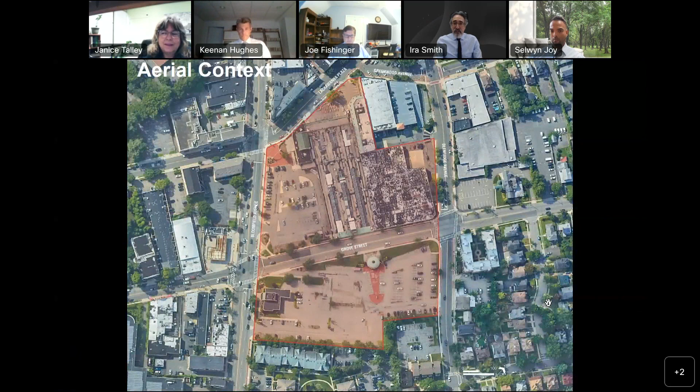As we look at a number of slides I'll share with everyone, I want to make sure it's understood that these are conceptual images, illustrations based on the current redevelopment plan and consistent with the guidelines and requirements therein. It doesn't mean exactly what you see will be built, but something very much like it. That's maybe a place where people might have follow-up questions, but as we go through the presentation, I'll do my best to explain what is a requirement versus what the guidelines might allow for.

Before we go on, I'll explain quickly. I'll take you through some visuals associated with each of these areas, and then we'll take a deeper dive into each. When we talk about leaner, we're talking about reductions in mass, meaning every building previously proposed has been touched. I'll explain how, and you'll see that in a few minutes. The number of residential units has been reduced—it was 375 previously, now it's 300.

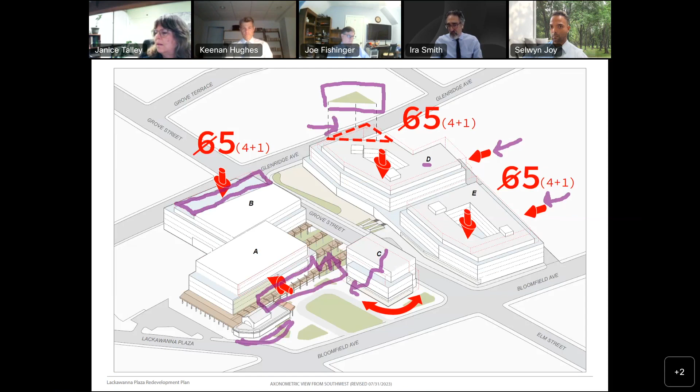And then finally, building C. Building C has been mirrored, and the result is that it now steps down toward the plaza in recognition of the scale of the waiting room, bringing more attention to the entrance of the supermarket and the historic platform canopies that will remain there. So it's still shaping that outdoor room, but doing so in a gentler manner than before.

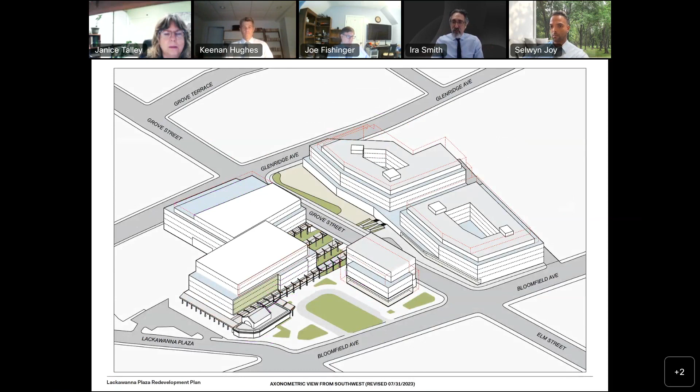And this is just to depict the same view without all of those notes and annotations. I believe this is being recorded, so people should have a chance at a later date to zoom in, freeze, or pause the screen, and see the difference between those dashed red lines and what I was just describing.

Next slide. Now we're actually in the northeast corner. We were previously closer to the intersection of Bloomfield, Gates, and Lackawanna. Now we're in the northeast looking toward the southwest.

We can see the rather dramatic removal of the mass shown in the dashed red lines here, producing the pocket park I've mentioned. You can also see how building B is scaling as a 4-story building along Glen Ridge and jumps up to 5, not 6 stories, as we travel southward.

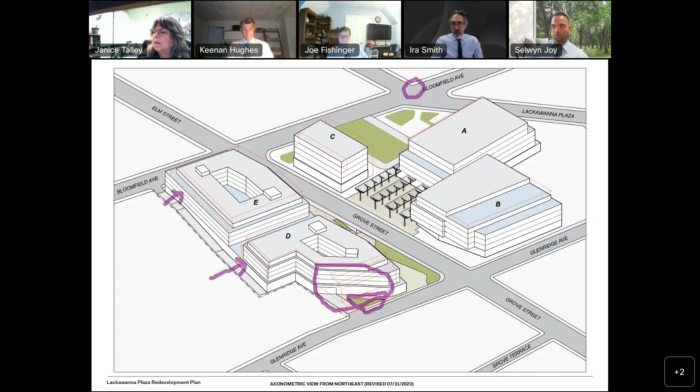You get a little bit better look at buildings D and E. Oops, sorry, Keenan, wasn't quite ready. You can see how the masses of buildings D and E have been pushed away from that eastern edge as well in this view. Okay, next slide, thanks.

So when we talk about historic preservation, the waiting room is the star of the show, and it's not going anywhere. There's language for its preservation and adaptive reuse, outside and in, but there are other historic elements on site. Next slide. All of these are described in greater detail in the redevelopment plan that was posted a few days ago.

But quickly to orient you, the platform canopy that faces Bloomfield Avenue remains complete and intact. The brick wall is what's removed, and that becomes the new face of the supermarket. There are other canopies on the eastern side of the waiting room; those also remain in place and are untouched.

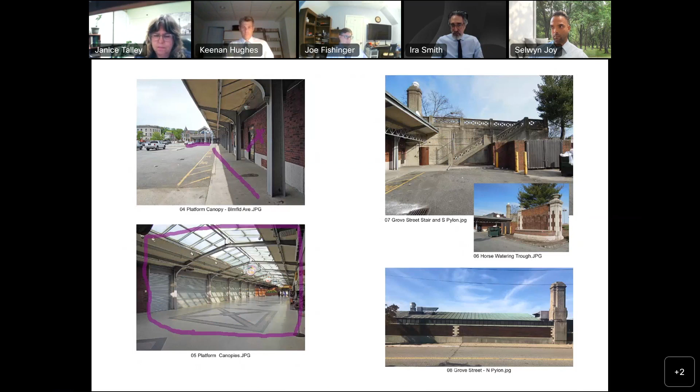Inside the mall, we have several platform canopies. Approximately half of those remain in place and bring character and a dynamic environment to the future station plaza, and I have 3D views of that. The other half of those platform canopies are allowed to be relocated in the plan, and that is the case.

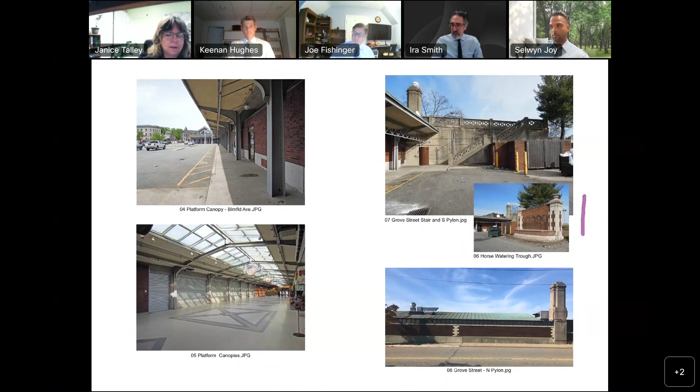Upper right, we've got the old commuter stair that leads up to Grove Street - that'll be rehabilitated and become functional again. The horse watering trough is one of the only other elements that is allowed to be relocated in the plan. Below that, we have this decorative pylon; its mate is closer to that commuter stair. Both remain in place and are to be rehabilitated.

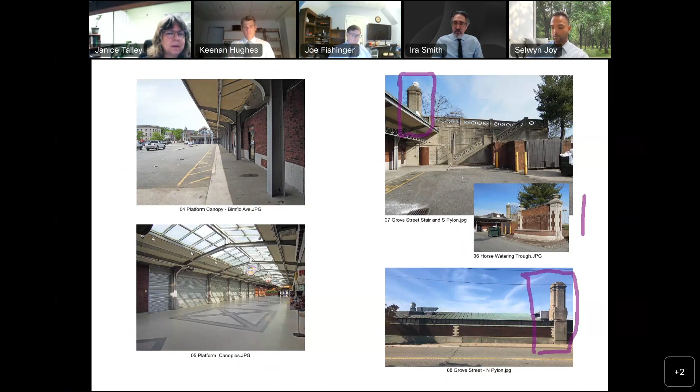Next slide. Ira, if I can just quickly interrupt, I'm sorry.

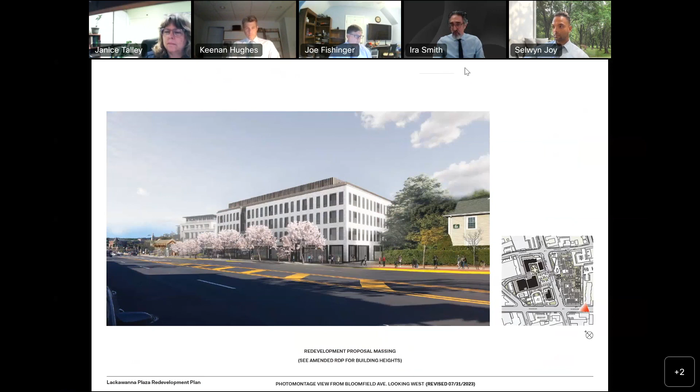This view's been circulating a bit, showing from across the street what the effect might be. The building will read as a 4-story building from most locations. If you're across the street, you'll get a peek at that 5th floor, or if you're further west going up slope, you'll get a peek at that 5th floor as well.

Greener. When we talk about greener, there are different facets of that as well. One entry point is to talk about open space. Open space not only facilitates the possibility of greenery, but also usable additional space—you could think of it as passive recreational space.

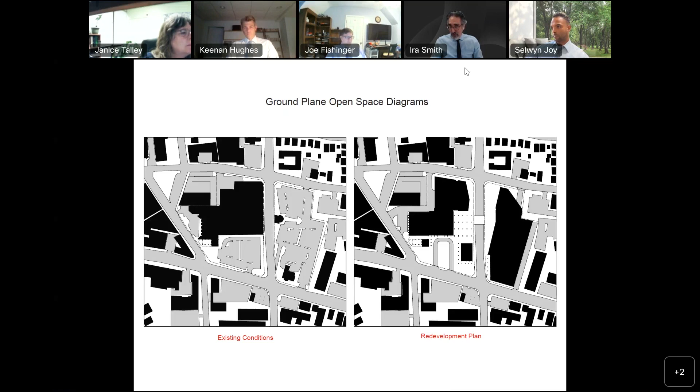It's important to note that these mechanisms for access and the intention for creating relief and open space in the town center is not new. This is a policy we've been working on for several years with redevelopment projects.

Seymour Street is the first example of that, where a public street was retired in order to create a public space that could serve multiple functions.

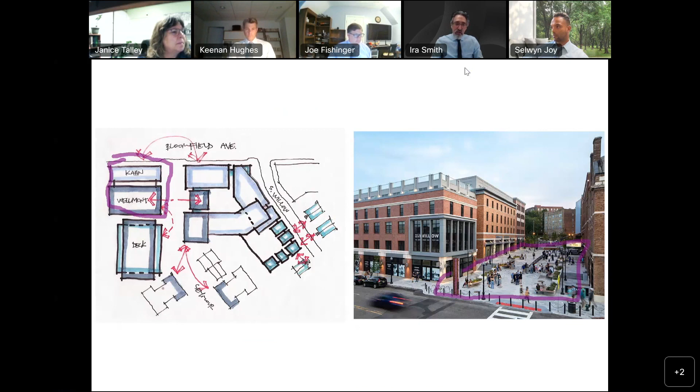We can also see a diagram on the left that our team worked on to help describe strategies for the redeveloper, borrowing from existing buildings—in this case especially the historic Wellmont and Kahn—to become influential on the design of new buildings, so character could be maintained even as we change the rules of the game toward creating more inviting, calmer, quieter, safer, healthier streetscape environments.

A lesser known project, just going by the number of people I recall in attendance, is another redevelopment plan under construction now on Church Street next to the Unitarian congregation. The first proposal was for up to a 6-story building that filled its block, but through very helpful feedback from the Planning Board, the Historic Preservation Commission, and other town bodies and commissions, the plan on the right is where we landed.

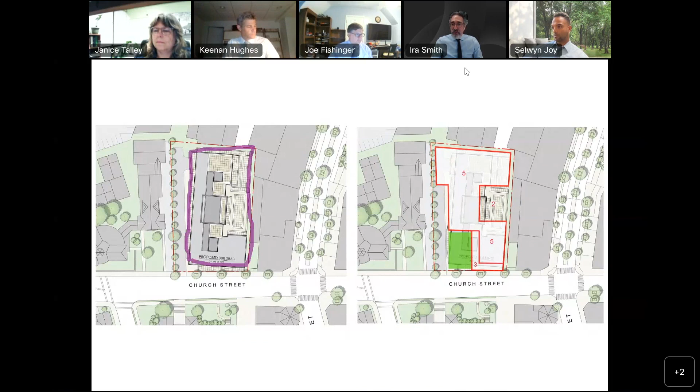Without getting overly technical, what was achieved was a much smaller frontage on Church Street. So you have a 3-story structure, stepping back on that 3rd floor to floors 4 and 5, and then pushing the rest of the building well back in order to create a public plaza, the depth of which matches the depth of the lawn in front of the Unitarian Congregation Church, in order to create a more ample space and preserve the character and sightline to that church, which is a beautiful building.

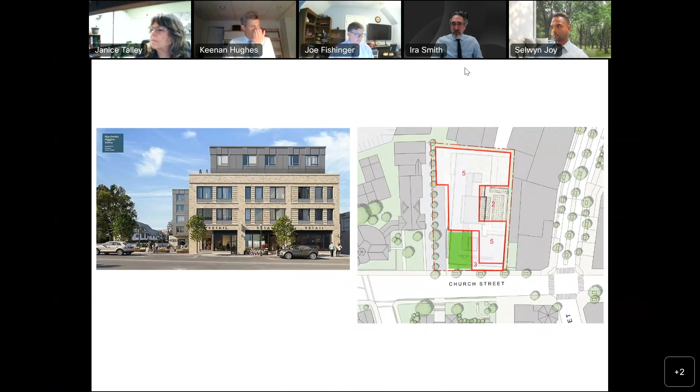So a lot of the same mechanisms and processes are at work here on Lackawanna Plaza. Next slide. I think this drawing is a good way to get into this conversation about accessibility, safe space, healthy space. You're looking at a diagram that is doing a lot of things at once. So the supermarket has certainly been a key element, maybe the key element, in this entire plan.

And we can see how it's accessible from a number of routes. I'll actually start with a vehicular one. You can get to the supermarket from the east. You can either travel into the main plaza and drop someone off and then pick them up later. You could take an Uber. It doesn't have to be someone you necessarily know that you're relying on to get there.

If you're traveling east, you could continue on and park by turning off of Lackawanna Plaza and traveling up a ramp to the parking garage that sits above the supermarket. And then you can descend directly into the supermarket, your choice of escalator, stair, or elevator. And to leave, you would ascend one of those routes and egress through here in your vehicle. You could either head northward or westward in order to decide whether you're going to go north or south at that point.

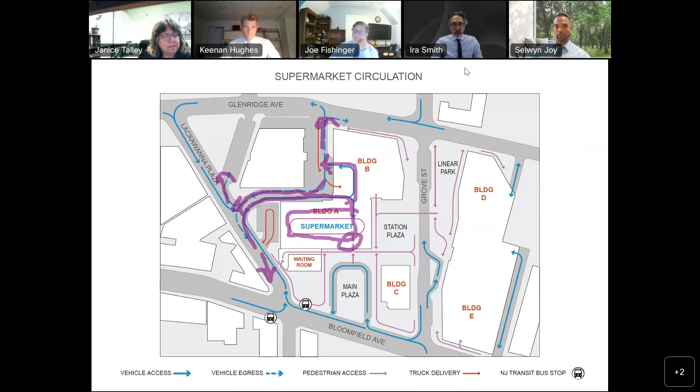I'm showing these routes because I think there may have been some miscommunications or misunderstandings, or dare I say it, misrepresentations of the many ways you can get to this parking garage. It's accessible as well, traveling from the east on Glen Ridge. You can enter this building this way to get to that parking deck above the supermarket. Obviously it's the same thing if you're coming eastward on Lackawanna, or rather Glen Ridge onto Lackawanna, you can get to that ramp.

For the sake of time I'll move on, but there are also thin purple lines. These represent the many ways in which pedestrians can easily access the site from neighboring properties. And it shows how we have retained the main plaza, Station Plaza, and the linear park, and this is now the pocket park, all of which you can access in a direct route if you'd like. You don't even have to stop and buy anything. You could just amble through here on your way, perhaps to Bloomfield Avenue and in reverse. So there's very much a park-like character to this entire property, which is unique to any development that's happened in this town in over 100 years.

And it's, again, not out of the blue. These are picking up on lessons that we've learned from most recent redevelopment efforts. Next slide.

So in many ways, the images I'm going to show you remain intact, and it's worth mentioning in terms of greenery, sustainability, the site, because it has new buildings, affords the design team, the redeveloper, the opportunity to better control stormwater. You're catching it on rooftops instead of asphalt, and bringing that water down in locations that best suit you.

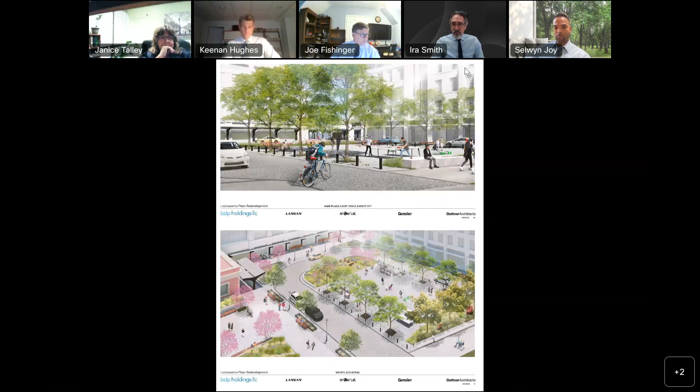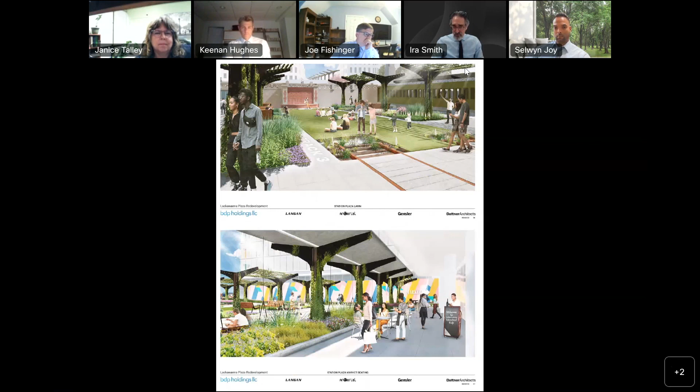So in the top view, we're looking east toward Grove Street, and in the bottom view, we're looking west toward the supermarket. Next slide. And the linear park, I think this image has been shared a lot and published quite a bit. The image above may not have been shared quite as broadly. I don't know if we can zoom in at all. Keenan, is that an option? If not, I can.

Okay, no problem. So you can sort of make out that both of these buildings—this is D on the left.

I got some enlargement on my end, thank you. D on the left has lost its 6th floor, so has E on the right.

But I want to call attention to what's happening at the ground level. We've got retail facing Bloomfield Avenue, a classic urban street wall, which transitions quickly to alcoves that will be outfitted with electrical and lighting to serve as flexible festival space, if people want to set up small areas to sell wares, crafts, and so on.

That'll be easily accommodated. Right where we have a grade change, which is pretty much existing—that dramatic grade change—there's a wonderful transitional space, a combination stair and ramp that brings you down to the lowest level of the site. That also is the point of entry for the residents of buildings D and E.

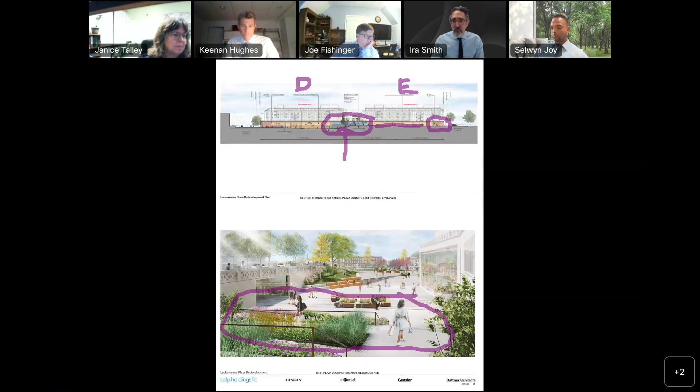That lowest point corresponds to the pass-through underneath Grove Street, and then transitions to a gallery wall, a reserved conditioned space, which we can see in the bottom right. The idea is that the property owner will coordinate with local galleries, institutions, and organizations who can use that space for changing exhibitions, so that the linear park becomes a destination of its own—a kind of outdoor exhibition space.

It's important to note that the passage under Grove Street is dramatically different than what we see today—much shorter because the rotunda is no longer there on the east side. The enclosure is removed on the west side, and the embankment is reduced on the east side as well.

So you'll be able to see very easily, before you even enter through here, Station Plaza as a destination—very wide and inviting, and a much better lit route than what we have today.

And then as we continue on, we have the return of retail along Glen Ridge. There's retail on building B as well, on the west side, in order to provide continuity with the commercial activity that's been percolating and evolving along Glen Ridge further west.

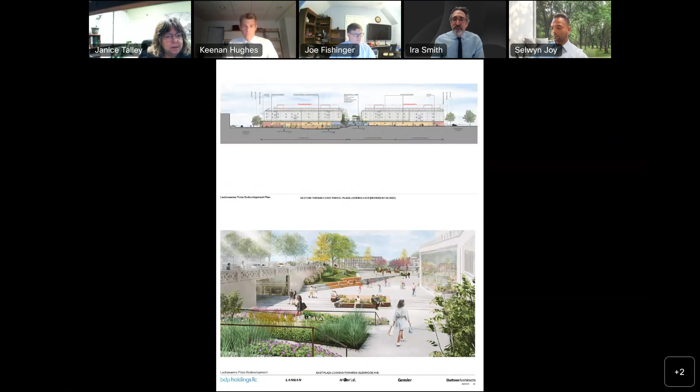It's important to note that at 8 a.m., you can see the shadows cast—this is the winter solstice, the day when the shadows are longest. At 8 a.m., the shadows are primarily contained on site, and by 9 a.m., all the shadows are contained on site.

At 11 a.m., shadows are contained on site. I'm in the upper right now. Bottom left, shadows are contained on site—that's 1 p.m. By 3 p.m., shadows are starting to creep onto neighboring sites.

Keep in mind, sunset is at 4:32 on the winter solstice. So at 3 p.m., we do have some shadow on the post office. The shadows have cleared the multifamily house at the northeast corner of Glen Ridge and Grove, so we're really only seeing a little bit of shadow on these properties.

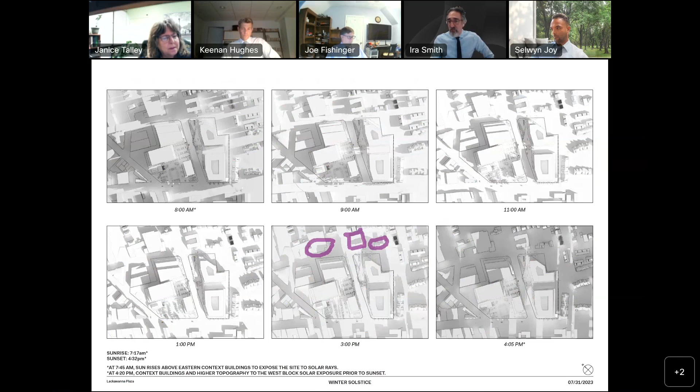By 4:05 p.m., the shadows are getting much longer, but that's going to be true for all of the properties in this area. Importantly, the shadows are just beginning to touch the Montclair Mews at 4:05 p.m.

At 4:20, one of the things we learned from producing this model is that because of the change in topography heading westward and the presence of First Mountain, you actually get a block of solar exposure—the shadow cast by the upslope conditions and First Mountain itself. So we're talking about a 15-20 minute period of loss of direct sunlight in the bottom right corner—not a very long period of time.

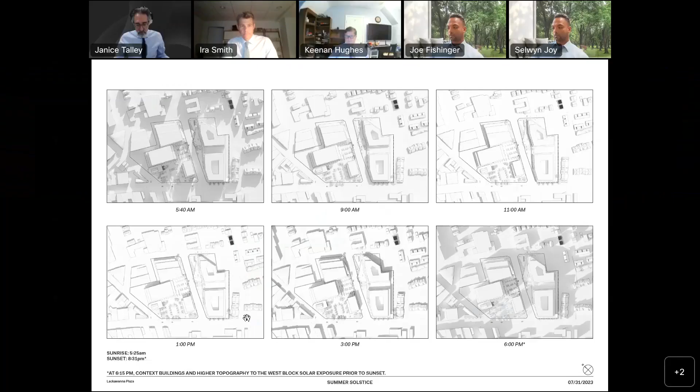Yeah, no, feel free to interrupt. I think this is the first time we've done a redevelopment webinar, so we're making sure we're getting it right.

So what I'll do, and I think I might need your help, Keenan, I'll walk through this. This is the second and final solar study I will share. I'll give a couple of examples of height reduction, but Keenan, maybe you might have faster access to the changes in height than I would. If we can't do it in this moment, I'm sure we'll be able to pick it up because I know you have slides that specifically show the current building heights. Yeah, I'm happy to cover that.

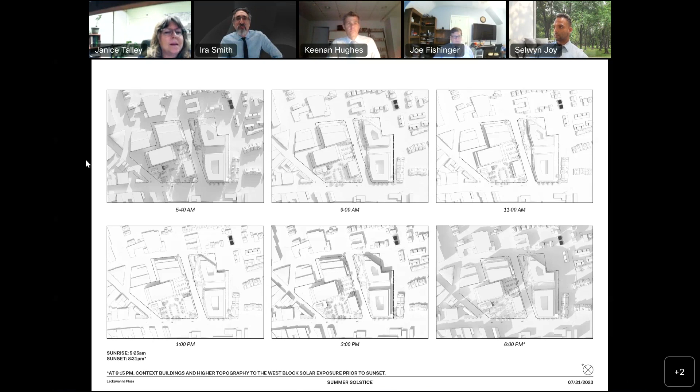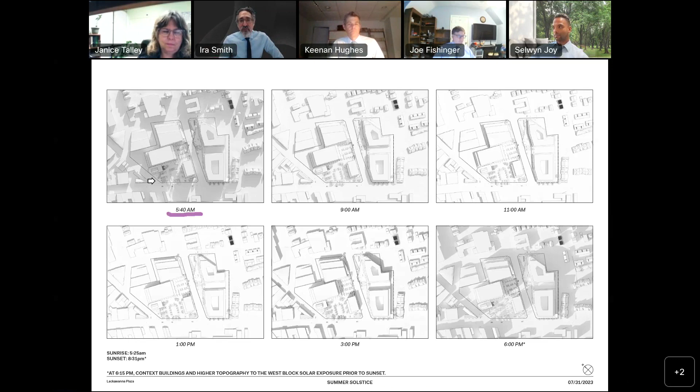So the summer solstice is another extreme time of year. It happens to be when the sun is highest in the sky compared to winter solstice. So it's no surprise that, let's say at 5:40 a.m., we do have shadows. They come from a different part of the sky because of where the sun is and the Earth's rotation, the Earth's axis of rotation. Most of those shadows that are long are dropping onto Bloomfield Avenue with low impact on neighboring buildings.

By 9 a.m., one can see how tiny the shadows are because the sun is increasingly overhead. At 11 a.m., the shadows are even smaller. 1 p.m. is practically the same, on the other side of noontime. By 3 p.m., we do start to see some shadows. By 6 p.m., the shadows start to grow.

Now, because of the rising topography to the west, we start to get shadows from the topography and First Mountain as early as 6:15, even though the sun doesn't set till 8:30. By 6:15, the area will be overwhelmed with upslope shadows. The Mews is barely touched here, Matthew Carter as well.

It's important to note for both the winter and summer solstices that I've been discussing, we're talking about one day of the year, and this occlusion or blocking of the sun will happen, as I've shown it, on those two days of the year, and for a little bit on 3 or 4 days either side of those days. So it's a very limited number of hours toward the end of those 6 to 8 days. Otherwise, the project is sculpted in a way that is very respectful of preserving light and air to its neighbors.

Last, I want to point out, because it's also been asked, well, all of this open space and the greenery, the screening on the garages shown on the east face and the south face, how much of that is really going to get sunlight? One can see, without going back, that for very large parts of every day, because of the orientation of the buildings and the fact that there's a big gap between buildings D and E, sunlight pours into the South Main Plaza almost every day of every year.

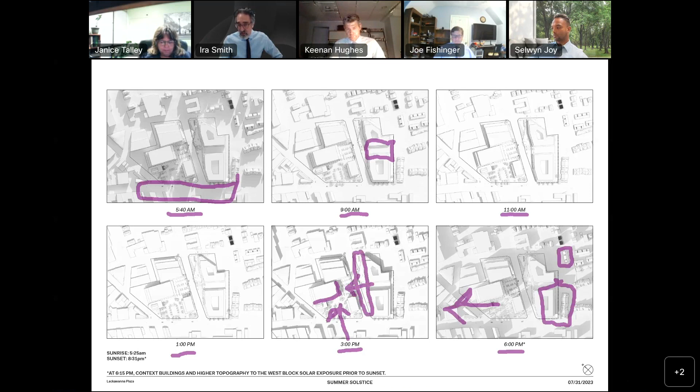You get an abundance of sunlight in Station Plaza, and you'll get sun because this is mostly separated by a great distance from everything happening on the west. The Linear Arts Park will also thrive and should not be a problem.

Now we enter the last piece of this presentation, my part. Again, I'll rely on Keenan for the differentials on the heights we used to have versus the heights we have now. I will mention before he does that there had been some discussion or claims that the buildings could rise an additional 20 feet beyond the number of stories or building height allowed. That language was in the previous plan because we were reserving a 10-foot by 10-foot footprint on each of the buildings for sustainable mechanical equipment.

There are certain kinds of machines that reuse water that falls on the building or that's being used in the building, repurposing it for gray water or for even cooling the building. So we've modified that language, so there's no extra 20 feet allowed. The change now specifies that a 10-foot by 10-foot by 20-foot tall piece can only be used if it is part of the sustainable mechanical systems.

So we go into robust historic preservation, and for those of you who know me and my involvement with the township in days past, I'm very excited about this part of the project.

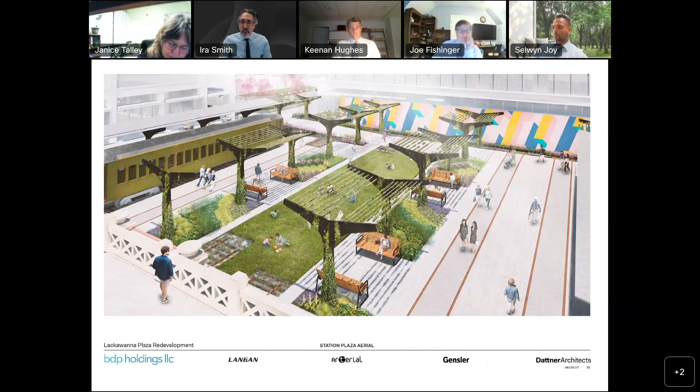So a lot of you have probably read about the redeveloper's commitment to rail transportation as a kind of personal passion. You are looking at the actual rail car that ran on the Lackawanna rail line, which the redeveloper purchased and is currently undergoing full restoration, I believe at the Whippany Railway Museum, a highly regarded regional center for telling the story of rail in this area.

These two views are already several weeks old, but the rail car serviced this station, and as unlikely as it is, the intention is for this to have a home in Station Plaza, or come back home to Station Plaza, serving the additional purpose of helping bring the station back to life and maybe becoming an educational tool so people can look in or possibly have tours of this rail car. It also provides a lot of character for the space.

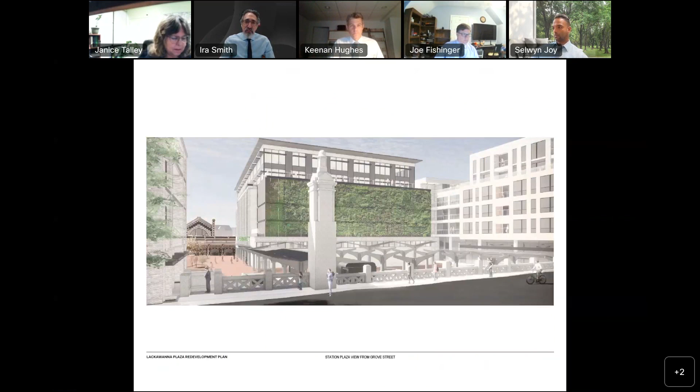Now we're going to see some new imagery related to this space I described, the skylit passage. We're still on Grove. You're looking at the station plaza on the left, down below us. The rail car is situated here. The supermarket occupies the first floor beyond, and this is the parking garage with one of the green screens shown.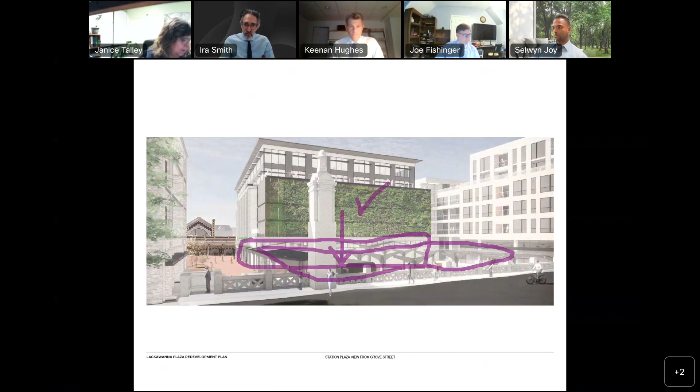But the part of this image we're going to focus on is over here, and the next slide is an enlargement of that area. So what you're looking at right now is the rejuvenation of this passage that connected Lackawanna Plaza, the street, to the east side of the site.

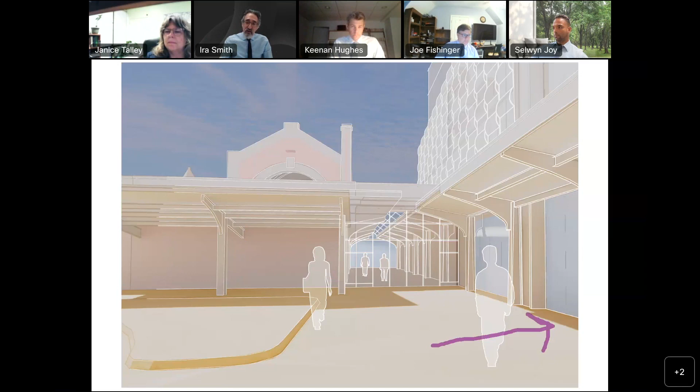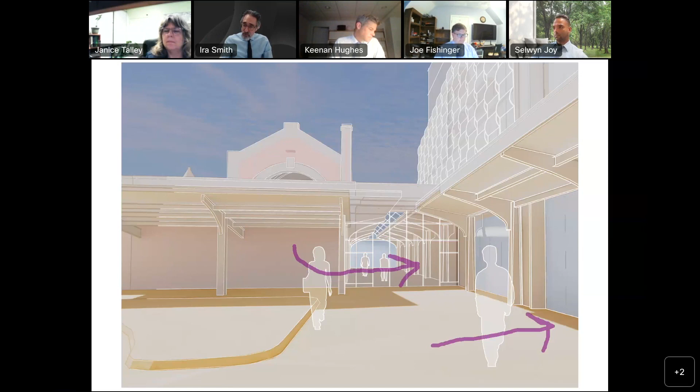You could walk up to the canopies or platform and board your train if you happened to be coming off of a carriage or later a car. You could walk right onto your train on that platform. But if you weren't using that first platform in the bottom right, you were more likely coming in through the waiting room and heading that way to one of the points of access off of Lackawanna Plaza where the other platforms could be reached. But maybe you were just walking from the west and needed to get to this platform.

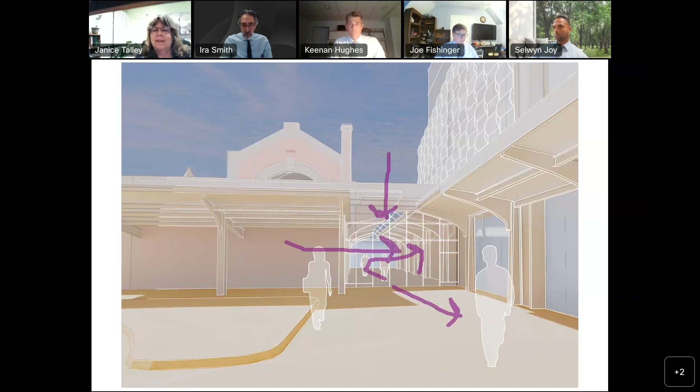So pre-existing was this space. It was open on both ends, had a skylight, and protected you if you were in the waiting room and it had been raining or snowing. You could wait out here before you went to the terminal shed area or headed east. This will be recovered and become an integral part of circulation in this plan.

How is this possible? How does it relate to Building A? You're looking at Building A on the right side of this image. It's no longer a sheer wall continuing up from the column line near the platform canopy. Here's the historic platform canopy.

It now steps back twice. Let me clear this. The first step back is 8 feet, and the next step back higher up for the 5th and 6th floors is 4 feet.

There's also a requirement now for a screen on the parking garage, which, as the prior view showed you, will help further reduce the apparent bulk and height of Building A. I hope this drawing illustrates how, by doing this, you clear out room for light and air to get back into that skylit passage, which is what you're seeing right here.

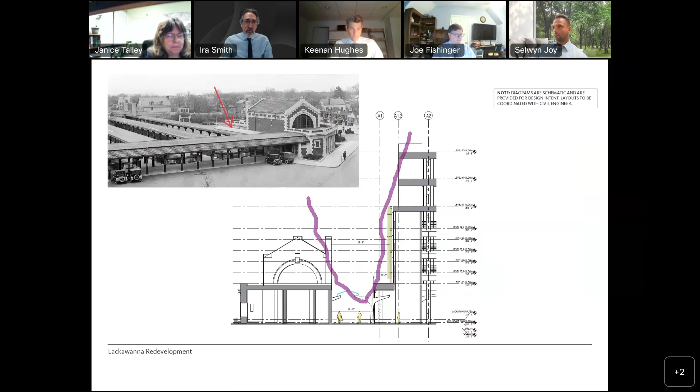In this historic photograph, you can actually see it. The red arrow up here is pointing to the skylit passage.

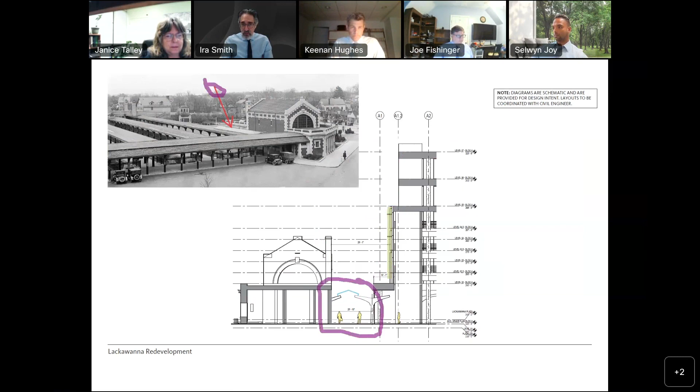So there it is on the right. This space exists today. It's just been blocked off to the east and west. Unless you worked at Pig and Prince or in Pineapple Express, where they store things currently, you wouldn't even know about this space. You can see up through the skylight the north face of the waiting room, a very dramatic, exciting view to have and to bring back to the public.

In the current redevelopment plan, looking now in the bottom left, we're going to open up the colonnade. It had always been an open outdoor space, and it's going to become that again. You walk past the waiting room to get a glimpse in, and there's a set of doors here, again historic, that will be made functional so you can enter into the skylit passage and continue on your travel eastward, or vice versa from east to west.

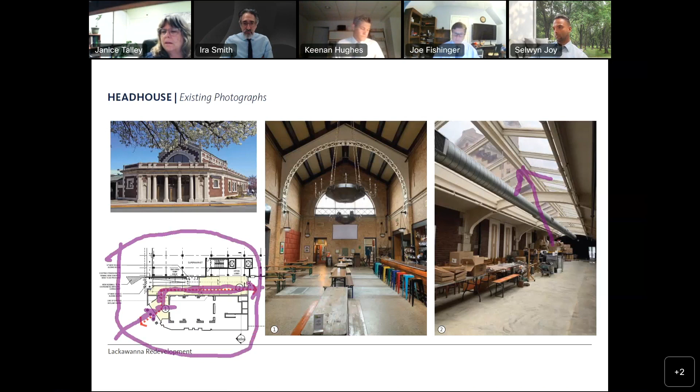I'm drawing over my drawing now. Next slide, it's an enlargement of that passage, that circulation path I just described, but it shows you a little more clearly how you can circulate from the east to the west, bringing back to life the original use of this western face of the waiting room.

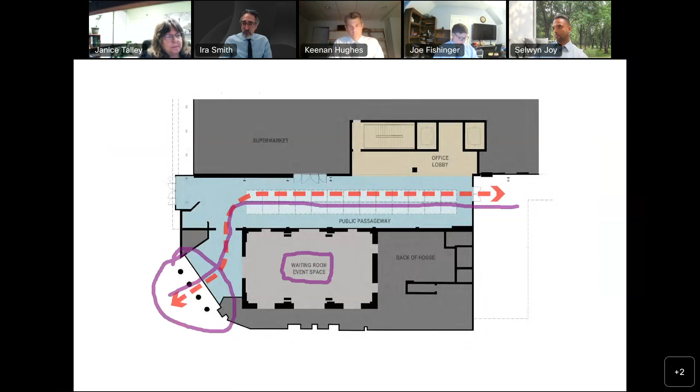Now, the waiting room itself, you see it's also called event space. The current plan describes the use as reserved for events, exhibitions, and similar spaces. I'll also mention that the plan allows for enclosing the east and west ends, so this can be a conditioned space, which turns it into a rather functional space.

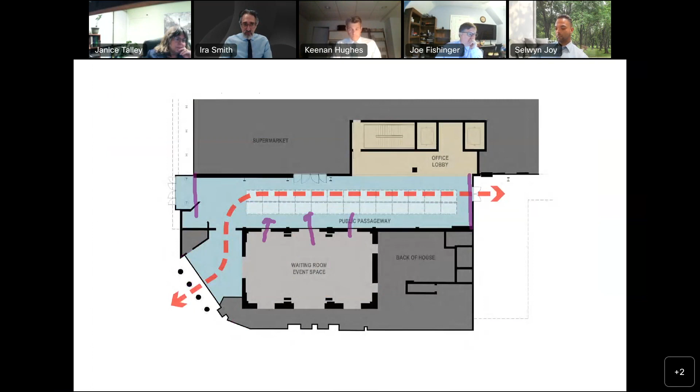For events happening in the waiting room, there's expandability. If there were to be, say, a nonprofit or fundraiser or some other event here, you're not limited to just the space of the waiting room. People could flow and share the two spaces, which increases its flexibility and possible uses.

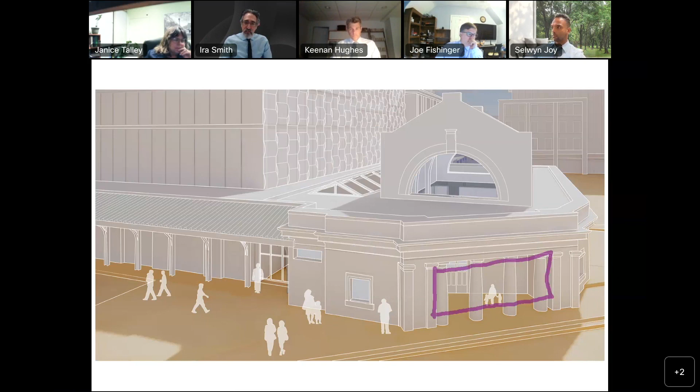Here we have a view from the west, and you get a good orientation. Presently, there's a storefront or glass and steel wall just a few feet in back of this colonnade. That goes away and returns this colonnade, or group of columns, to an outdoor space. So you are invited in to the doors I've mentioned.

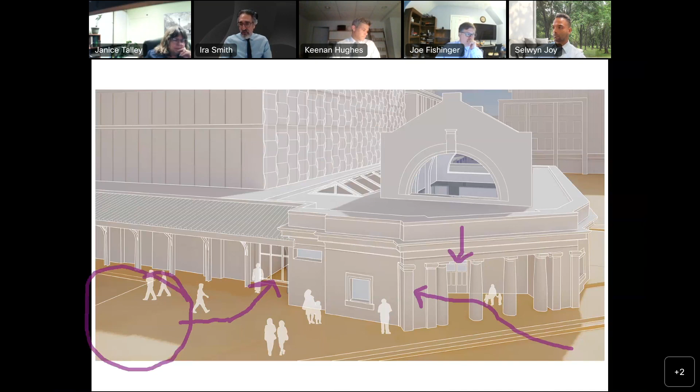Here are the waiting room doors, so you get a peek in if you'd like. And the storefront enclosure over here on the left, beside the terminal shed, because the plan expects this former parking lot to be used for pickup and delivery for the supermarket, as opposed to typical consumers using that parking lot. The expectation is that we want to separate the more commercial traffic from the more consumer pedestrian traffic. So that's how that would work.

We have one more view of this layout. Ground level, this gives you a better appreciation for how the terminal shed will appear. Building A steps back from that roof. We can see the entry into the waiting room and the doors that let you into the skylit passage.

You'll also notice this view, which is showing the screen in front of the parking to minimize the mass and its presence. We have 4 swatches on the upper left of this image, and we also have more traditional manners of screening that are described in the plan. But in accordance with historic preservation guidelines, you don't want to create an architecture that confuses the public as far as what's old and what's new.

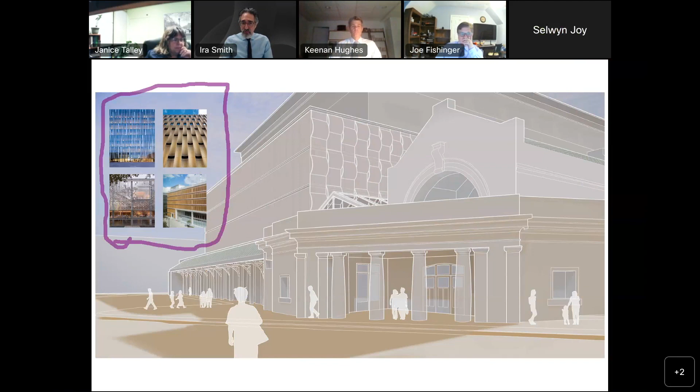I do believe that it's possible to have a beautiful screen that's dynamic and sensitive to the craft and scale of the waiting room itself. So you're looking at 4 examples of that. Upper left is frosted window sort of scales, if you will. Upper right, you're looking at metal perforated banners that are interwoven. Bottom left is a honeycomb of ceramic elements that disguise what's behind. And then in the bottom right, a more straightforward treatment of vertical wood ribs.

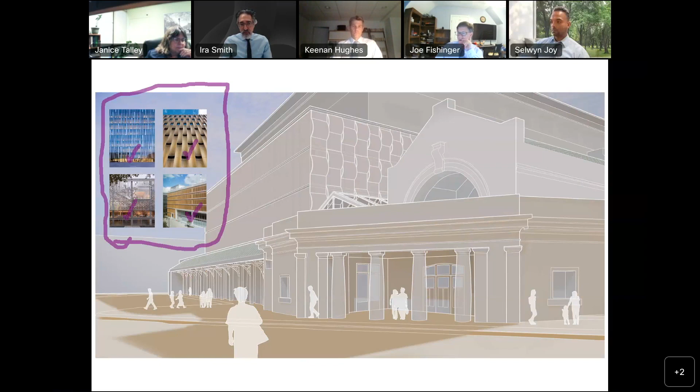All of these are depicted in the redevelopment plan and are possible directions, as well as solutions that could be more traditional, with the caveat that one doesn't want to put a building beside the waiting room that competes with it in character or appearance.

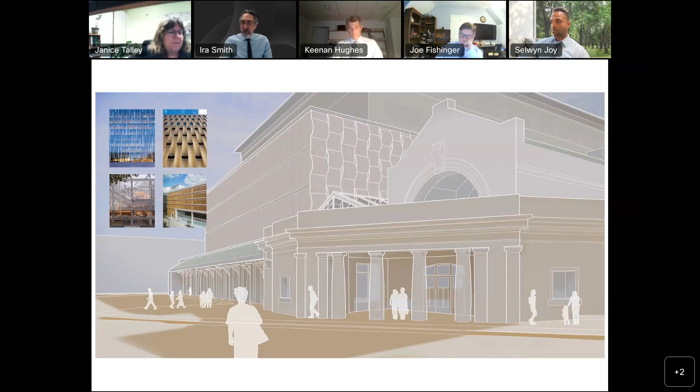Next slide, and it'll be my final note: style, sustainability, and next steps. Big intro for one last slide from me, and then I'll be returning this to Keenan.

I want to make sure people understand, when you look at the building masses in this presentation and that you've seen previously, we're using white or very simple boxes, because the character of the buildings gets determined following the review and approval process for this redevelopment plan. The massing, the step backs, and the site plan are really what's in conversation now.

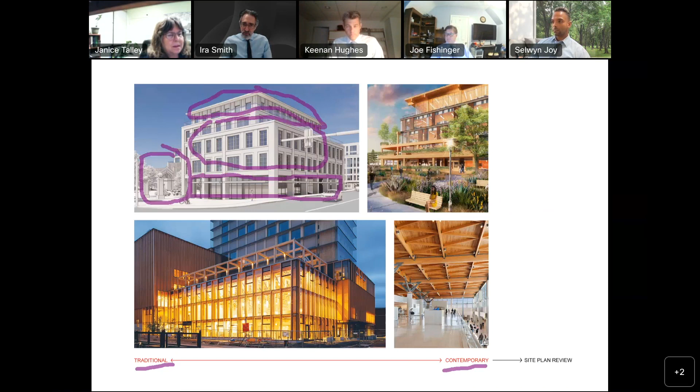You can see how it employs the principles described in the plan of traditional design on our main street, of a base, a middle, and a top. There are ways to do this with historic character, and there are also ways to do this with a modern design.

Below it we have a building of similar scale, which is much more of the 21st century. This is a mass timber building, rating very highly in terms of sustainability. Mass timber buildings don't necessarily need to be quite as prismatic as this one. The building on the upper right is mass timber.

You can do stepping back with mass timber, just like with other building systems. But the point is that it's easier to achieve some of the high goals set in the redevelopment plan when you adopt more 21st century strategies for sustainable design and reducing the carbon footprint of the project overall. This matters quite a bit.

One of the benefits of this type of design is that mass timber behaves like steel, and you can get some very dramatic spaces with what we call cantilevers or long spans, which can happen outside a building or inside a building as well. So it gives you great flexibility of use.

But none of this has been determined yet, because what's called the site plan review, a very brief term, actually covers a lot of ground, including what architectural character will play out on the site, whether all five buildings will share a DNA and style, or whether they might be related but different, or all five unique, some more historic and some more modern leaning.

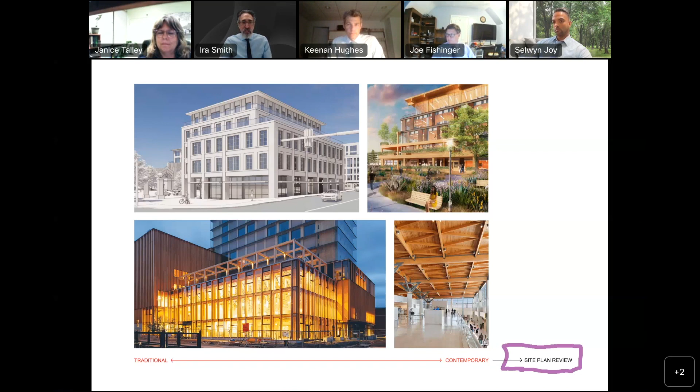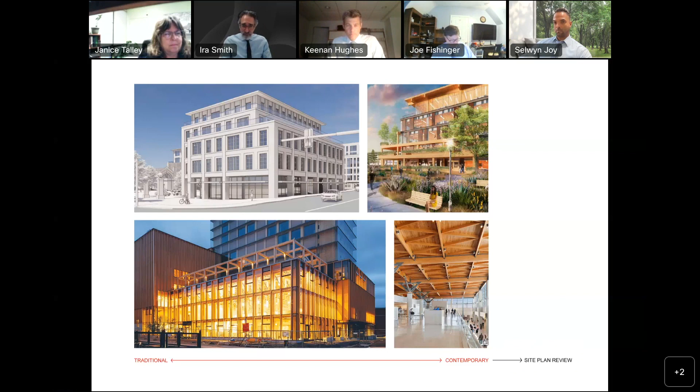So that's all TBD and not really part of the redevelopment plan, although you can read about options and possible illustrations for buildings that we intend to use as standards or milestones for the redeveloper. With that, I want to thank everyone for their patience. Janice, maybe before Keenan picks it up, this is a good time to tell everyone how to reach you with any questions for our presentation this evening.

Janice, you're muted.

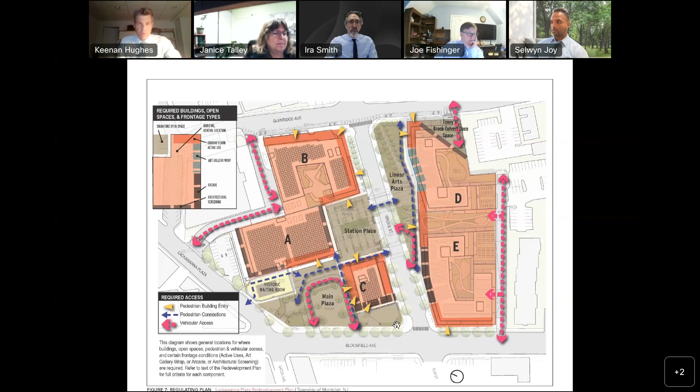However, here's where I can talk in more detail about reductions in mass and building height in particular. All of the carving away of mass that Ira was describing and visually representing through those renderings really gets implemented through the plan. There's a couple of tables, and then also figure 8 here, which controls all of the setbacks at grade, and then the upper story step back requirements for each respective building, as well as the maximum building heights.

So a few significant changes to point out, starting with building A. As Ira indicated, there's some significant stepping back of the upper stories of this building that was not originally required in October. So here you see a step back of 6 feet, stories 2 through 4, and then up above that is another step back of 12 feet for stories 5 and 6. And we've actually now included a very detailed diagram of the relationship between the historic waiting room and building A, and that's figure 9 in the revised plan.

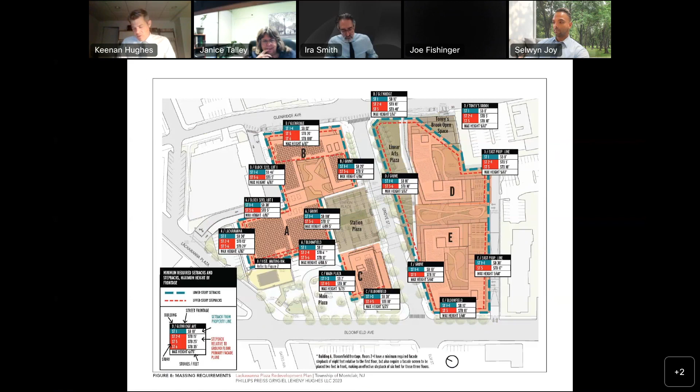In addition, for building B, a very big change here is that the 6th story has pretty much been completely diminished from the Glen Ridge Avenue frontage of the building itself. Whereas in the prior iteration, stories 5 and 6 were stepped back 20 feet from Glen Ridge Avenue, now we have a 100-foot step back for the 6th story, and the 5th story remains at a 20-foot step back from Glen Ridge Avenue. The overall height of the building has not changed, but those step backs have been adjusted significantly.

Now for building D, we did have a pretty significant change in the overall building height by losing a story. The prior iteration allowed a maximum height of 77 feet, and this revised plan allows a maximum height of 67 feet. And of course, all the step backs have been adjusted accordingly.

And then for building E, whereas the prior iteration of this plan allowed a maximum height of 74 feet along the easterly property line adjacent to the Mews, what's allowed now is 60 feet. That extends along that property line as well as along the Bloomfield Avenue frontage, wrapping around to Grove. So with the loss of a story, we've been able to push the height down to 60 feet throughout building E on those frontages. So there are some pretty significant changes in building mass that now get implemented through this figure as well as the tables in the plan.

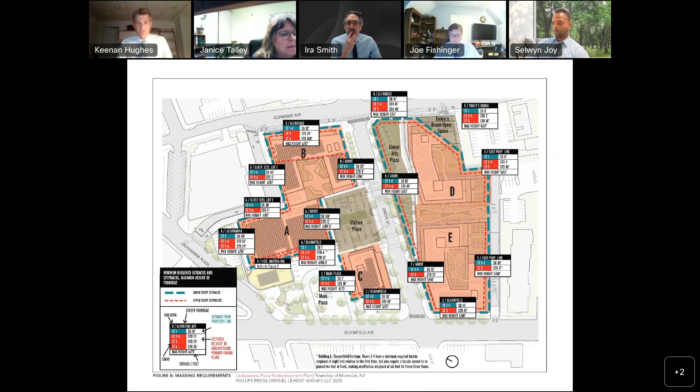I did want to also run through some other significant changes and how they've been documented in the plan itself. So of course, with the reduction in building mass, there has been a reduction in the development program, in particular in the residential component. Whereas the prior draft allowed 375 total residential units, now 300 total units are allowed in this revised version of the plan, and that language is on page 28.

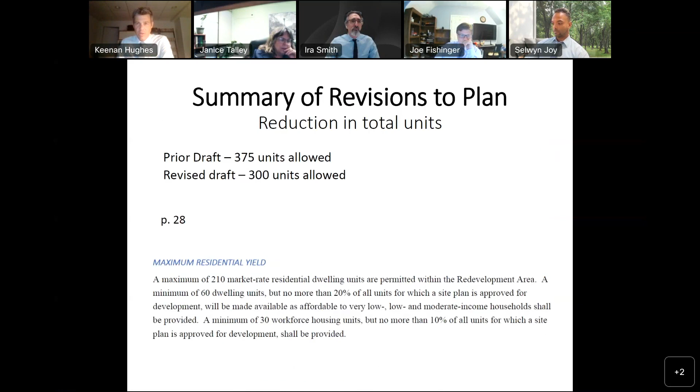You may recall that this plan allows for a certain percentage of the residential component to be what we're calling short-term rental units. The prior draft allowed 15% of the total units to be short-term rentals, and this revised plan has reduced that to 10%, and that's on page 25.

The open space—while the prior plan was very clear in terms of requiring 3 different signature open spaces, there was no pure percentage requirement for the overall site relative to open space. So we've added that in this revised version of the plan. A minimum of 20% of the overall redevelopment area must be dedicated to open space, which includes all landscaped areas and hardscape plaza areas. And that changes on page 28 of the plan.

We made a couple of adjustments to the parking requirements based on input from our parking consultant, Jerry Giosa, and I'll do my best to describe those, and perhaps Jerry could jump in later if he needs to clarify anything. In particular, we added a restaurant-specific parking requirement, whereas before restaurants, as I recall, were grouped into a general retail category. Now we have a specific requirement of 1 space for every 3 seats, which is something that Jerry recommended.

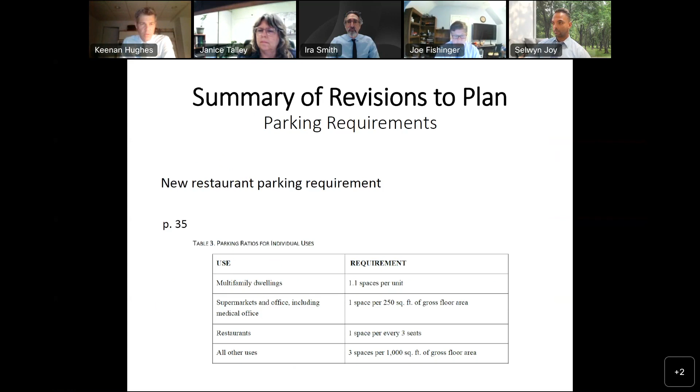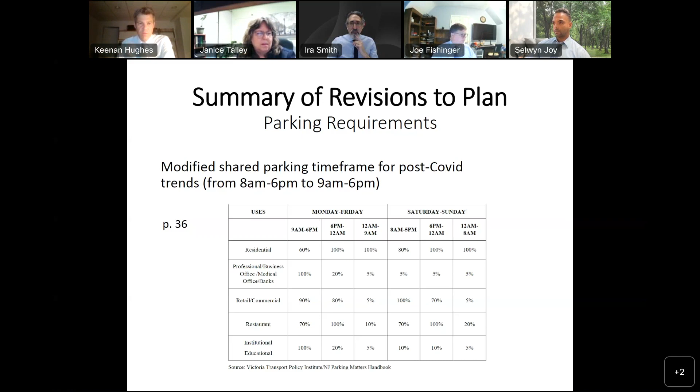Likewise, you'll recall that the overall program here contemplates a mix of uses such that we can employ a shared parking program. There was some discussion during our presentations last fall about the impacts of COVID and commuting trends on the shared parking formulas. In particular, what Jerry recommended was that he's finding commuting patterns on weekday mornings for residents aren't as regular as they used to be. Therefore, the time frame for the residential component has shifted from 8 a.m. to 6 p.m. to 9 a.m. to 6 p.m., in light of the fact that many people tend to either stay home or commute later in the morning. So that's been reflected, per Jerry's recommendation, in this table on page 36.

We've also significantly increased the bicycle parking requirements within the plan area. This was another comment we heard from the planning board and the community back around the time of the original presentation. So the residential requirement has been increased from 1 space per 10 residential dwelling units to 1 space per 5 units, essentially doubling the residential bicycle parking requirements. We've also added a commercial requirement to the plan. This is on pages 36 and 37: for the commercial component, bike spaces shall be provided at a rate of 1 space per 2,500 square feet of non-residential gross floor area. We want to make sure there's adequate bike parking, both in terms of outdoor rack spaces as well as potentially enclosed storage spaces within the buildings for tenants, employees working in the office, and employees of the supermarket and other tenants within the redevelopment area.

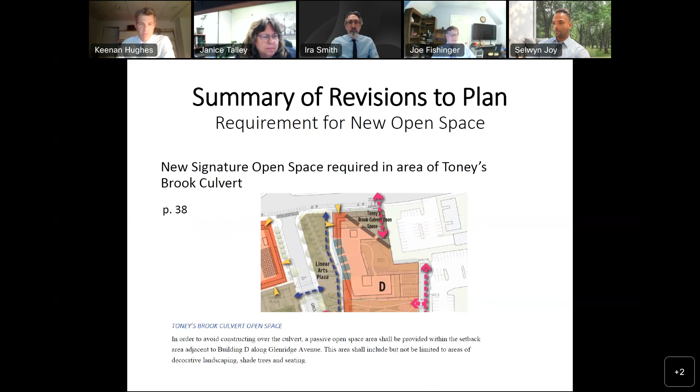As noted earlier, there's this fourth additional open space required by carving away the northeasterly triangle of Building D. We're creating this new open area that we're calling the Toney's Brook Culvert open space. That's now required, and it's detailed on page 38 of the plan.

In general, we've enhanced and gotten more specific in terms of landscaping requirements for each of the respective open spaces. For the main plaza, a minimum of 25% of that space shall consist of non-hardscape planted areas, and also include a lawn area of at least 2,500 square feet. We heard feedback that we didn't want another pure hardscape space within the downtown, so we've tried to integrate as much greenery as possible through these requirements, particularly with the main plaza. Likewise for Station Plaza, there's a minimum of 25% non-hardscape space, plus another lawn area of at least 1,000 square feet. And finally, for the Linear Arts Plaza, that one will also be a 25% non-hardscape space on the east parcel.

We've also added some language that requires the redeveloper to provide an easement that would permit a shared egress driveway to Lackawanna Plaza, to the benefit of the adjacent property owner, which is block 3213, lot 1. That language is now on page 39 of the plan. That would be executed presumably as part of the site plan review process as a condition of approval.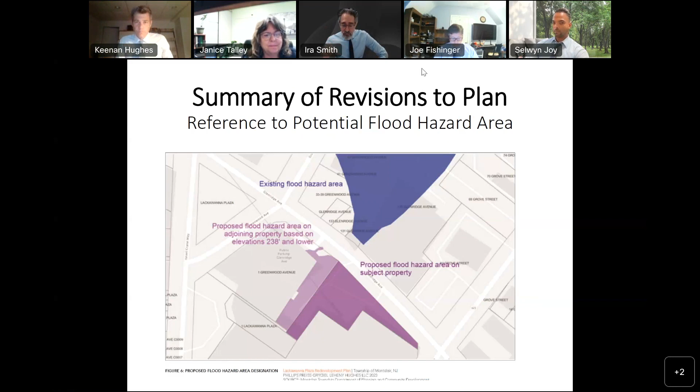Let me jump in for a second, Keenan. I do have the building height listing. I could go through that really quickly just to round that out. So we're talking about 5 buildings. Going to go through all of them just to be complete and transparent.

Building A, there's no change to the height, although there is the cumulative 12-foot stepping back relative to the waiting room. Building B is the one that lost the 6th story along Glen Ridge. It was previously 87 feet along Glen Ridge, it's now allowed 76 feet. Of course, that's the 5th floor, and there's a stepping back from the 4th floor to the 5th, so it won't register as a 5-story building on the sidewalk.

Building C is unchanged in height, although it got flipped around so that the mass of it is more respectful to the scale of the waiting room. Building D, that's also the northeast corner, that lost the 6th story, so that was previously 77 feet along Glen Ridge, now 67 feet. Same along Grove for Building D. It used to be 75 because of the grade change, now it's 67. And then last, Building E, the building at the southeast corner, that was previously along Bloomfield 70 feet. It's now 60 feet, and there's a corresponding change of 10 feet along Grove Street.

Okay, thank you, Ira. Let me go through the list of questions that I have here. Again, my email address is jtalley@montclairenjusa.org. So the first question we have here is: was the developer, David Placek, informed of these revisions?

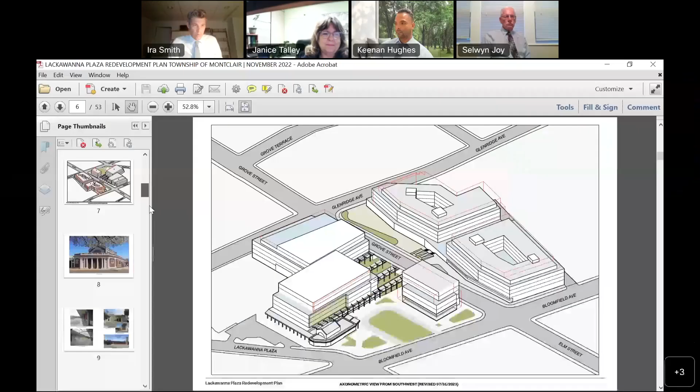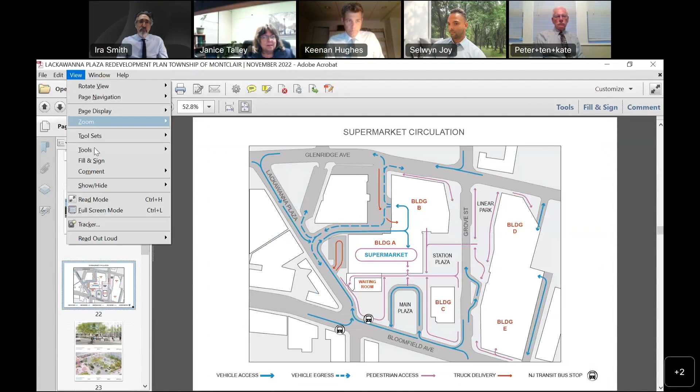So should we go back to the circulation diagram? Sure. Can you see it? Yes. Can you enlarge it all, or go to full screen? Thank you. So the ideal circumstance—there are different forms of limitations on mobility. Obviously, if we're talking about entering this site, there will be curb cuts with depressed ramping, which is standard now for all new construction. So you'll be able to cross from one sidewalk to another in a walker or a wheelchair, for example. So you can get onto this site. It wouldn't be any different from any other new development in that regard. There wouldn't be a curb or a wall ringing this site.

Now, if you're approaching the supermarket at grade, all of the grade will be designed in accordance with ADA regulations, which means there wouldn't be any additional steps or barriers to get you to the supermarket. We've discussed a curbless drive lane situation for the main plaza, so if you happen to be arriving by car, you would be dropped off essentially at the same grade, or very close to it, as the supermarket. There might be a slight code-compliant incline or decline to get into the supermarket, but there wouldn't be a threshold that you would have to overcome.

You could, in a walker or in a wheelchair, just be rolled right in. So that's if you're arriving under your own power, or if you've been dropped off on the main plaza to go in and out. But the same would even be true—let me get rid of the annotation—the same would be true if you were in a car and able to drive yourself, and perhaps transitioning to a wheelchair or walker that you brought with you. You would drive in your vehicle up above the supermarket, park, and take the elevator down directly into the supermarket. Again, no changes in grade. I hope that answers the question.

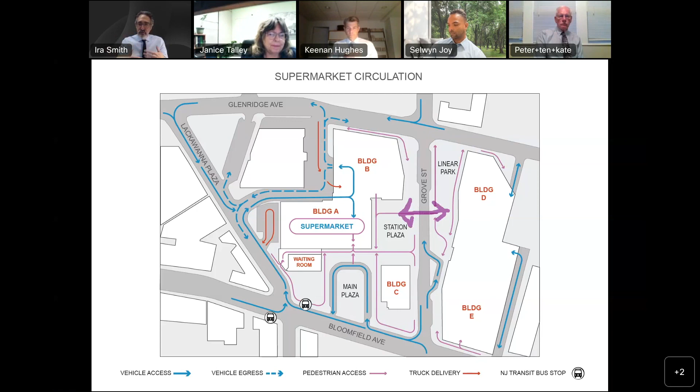Yes, that's right. Both in the rendering for the linear park, as well as one of the illustrations in the redevelopment plan, it shows how one can combine a large monumental stair with a ramp so that the two can coexist in a very harmonious, beautiful way.

Okay, thank you. We have a question here about what percent of the 300 dwelling units will be affordable housing. I can answer that quickly. It's 20% will be affordable.

So we'll be getting 60 homes affordable to low and moderate income households. On top of that, we'll also get 10% workforce housing, which will be affordable to households earning between 80% and 120% of area median income.

Where will the taxi stand be located for ease of access to the supermarket? I don't believe that the redevelopment plan identifies the taxi stand. We identify short-term parking, along the loop driveway access from Bloomfield Avenue, as well as that small loop from Grove Street, to provide short-term parking to building E and D.

Is there any language between the Township of Montclair and the developer to have a certain percentage of Montclair residents on the project? I believe, the way Montclair normally addresses these types of issues, it's not appropriate to address that in terms of hiring Montclair residents. In the redevelopment plan, quite often that is part of the redevelopment agreement or financial agreement between Montclair and the developer.

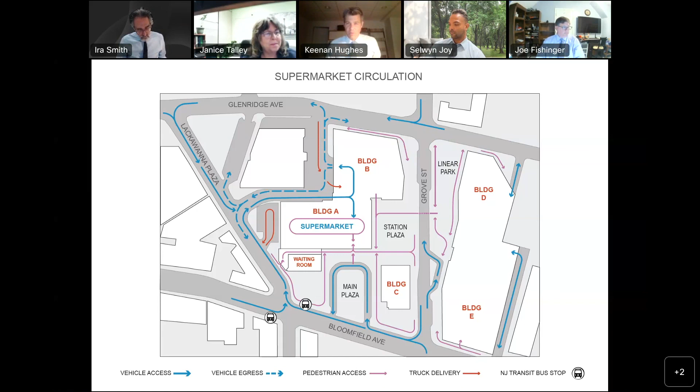I have a question here. Is there a specific allotment that will be used for very low versus moderate income? That is established in our code. We have a maximum number of moderate income, a minimum number of very low income, and what's left will be low income. This applicant, or whoever develops this property, will be required to meet that distribution of units for those different income categories. And I don't have them off the top of my head right now.

Next question: can we be presented with realistic photos? For example, the view from Glenridge Avenue by the Matthew Carter apartments shows building D as significantly shorter than 2 Clover Hill Place, even while building D is elevated uphill. Ira, can you respond to the photo simulations that we prepared?

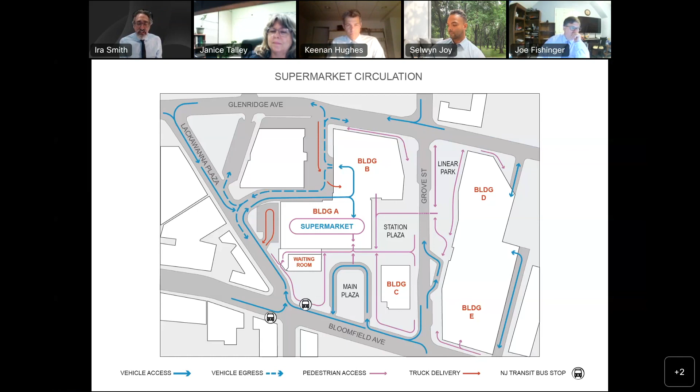Yeah. It's a matter of optics and physics, meaning building D is so far away from Clover Hill that it perspectively just gets smaller. Just as someone walking away from you, the further they walk away, the smaller they appear in stature relative to whatever is close to you. So that phenomenon is what's at work there.

And the photo matching was done using a similar program as the solar studies. It is very reliable. I think it's tempting, of course, if you don't know these programs and haven't set up these views before, and I took that original photo myself. It's tempting to imagine that it must have been fudged or it can't be right, but it is optically correct.

And while the land is rising slightly, I think it is also the case that because building D is so far away, we're benefiting, if you want to put it that way, from the great distance that makes building D just look smaller than you would expect.

Question: why do buildings A, B, and D, E need to be connected by concrete? Are they in essence one building each? That's an interesting question. A and B are connected, and you could say they are one structure. D and E are connected, and you could say they are one structure. However, if we were doing this live, I'd ask you to raise your hand if you think the buildings at Seymour Street are one big building. It's actually several buildings that share the same base, the same structure, and that's what you have here.

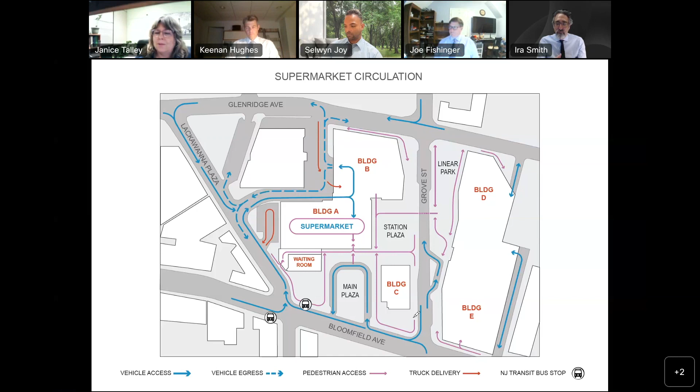Ira, I think I'll throw this one to you as well. So that's quite open-ended, and I would like that person to reach out to me to talk more about that. But when we talk about different ages and abilities and use of space, one goes into territory that maybe some of us don't think about, but it would include sound and smell in addition to sight.

So it's entirely conceivable that - and I have seen studies prepared by the landscape architect for this project - where they are contemplating not just native plantings and so on, but opportunities for butterfly gardens or scented plantings.

These can be very useful to people who are orienting more by smell and sound, and provide a different kind of experience than simply being able to get around from one place to the next. So relying on certain types of flora, which bring out certain kinds of fauna, would be a way to get at the universal design that addresses interests of all ages.

But there might be more behind that question, so I'm curious what the person was thinking about. One of the attendees asked about the name of the food store. The name of the supermarket has not been publicly disclosed, so we can't talk about that tonight. In fact, we don't know for sure who the supermarket will be.

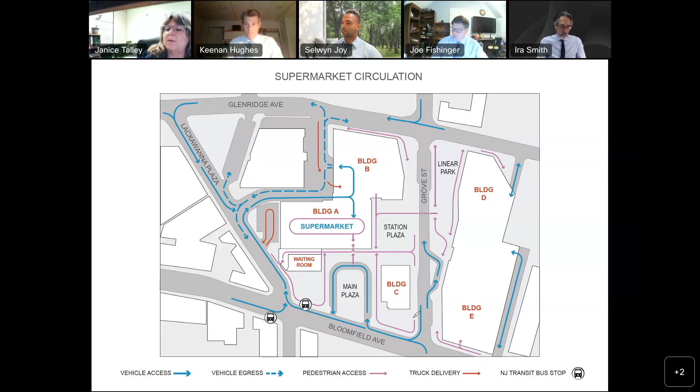But Janice, Keenan, is there more to say on that? I think you answered that question. We have about 7 minutes left, and I want to try and get through the rest of these questions I have here. There's a question about what will happen to the original glass-enclosed 60-foot train sheds.

Ira, can you respond to that? So the glass that is between the sheds—I call them platform canopies, they're sort of butterfly-shaped concrete roofs—the glass we see between those roofs was introduced in the 1980s. So I want to be careful to say original is different from historic. Those skylights that infilled in the 1980s will be removed. There's no expectation that those skylights would remain.

Okay. Let's see. It seems that shoppers and trucks use the same entrance to the supermarket. Do you think this may cause a bottleneck? Joe, can you address that question? While shoppers definitely can come in the same way, the trucks are all generated to come in from Glenridge Avenue. They will come into their own area, and vehicles coming off Lackawanna Plaza will have their own dedicated lanes.

So while they'll be adjacent to each other, they're not going to be coming in the same drive aisle. They will be exiting out to Lackawanna Plaza on the same roadway. I believe that the entrance from Lackawanna Plaza is also a ramp, so it'll be elevated above where the loading is, correct? Yes, the cars will be coming into a different level of the garage than a truck would. Okay.

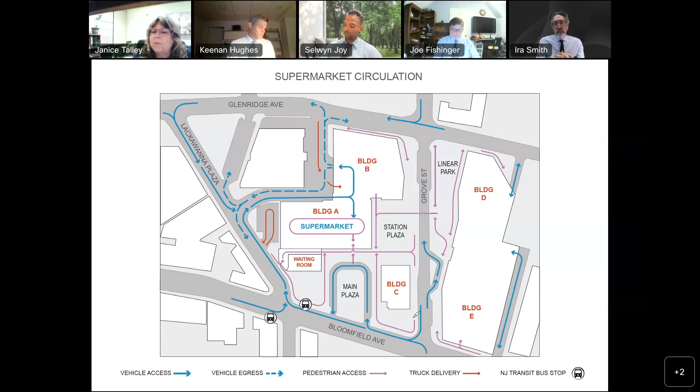And I have one last question. What will the north face of building B contain? Will there be ground floor retail, facade screens, etc.? Retail—yeah, retail with residential above.